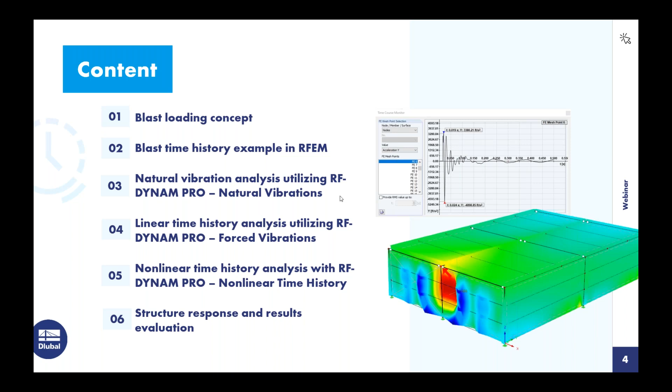We're also going to be utilizing a few different add-on modules within the program. The first is RF-DYNAM Pro Natural Vibrations, which will allow us to run a natural vibration analysis for our structure to determine the angular frequencies, the natural frequencies, and natural periods. Then we'll move on to a linear time history analysis utilizing RF-DYNAM Pro Forced Vibrations.

Finally, we'll take into account any material or geometric nonlinearities with the additional add-on module extension, RF-DYNAM Pro Nonlinear Time History. Through all of this, we'll definitely be looking at the structure response as well as the results evaluation for each one of these results.

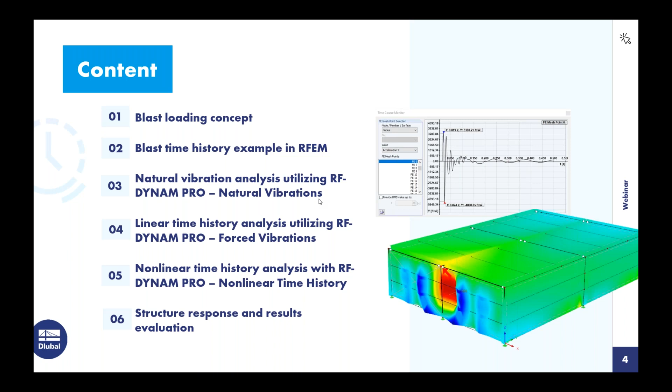Okay, so getting into the blast loading basics. As I mentioned, we're primarily going to be referring to the AISC Design Guide 26, Design of Blast Resistant Structures. We'll also be making some reference to the United Facilities Criteria 3-340-02, Structures to Resist the Effects of Accidental Explosions.

There are many more references out there for blast time history, but for today's example I wanted to specifically refer to Design Guide 26, because this simplifies the time history analysis quite a bit and was just the best guide for today's example within the program.

Now, what are the factors influencing structural damage when we talk about these types of explosions? Well, we know that the structure material is definitely going to play a role, as well as the overall mass and stiffness. What else is important to know is the explosion type, as well as the distance to the structure. Clearly, a larger explosion in closer proximity to our target structure is going to cause a lot more structural damage than what we'd see from a smaller explosion located further away.

And finally, the blast orientation to the structure. Is this located at ground level? Is it up in the air? What proximity to the structure? And of course, if we are located in an urban environment, do we have surrounding structures that we need to consider as well? Now, the ultimate goal here is not necessarily to avoid extensive structural damage.

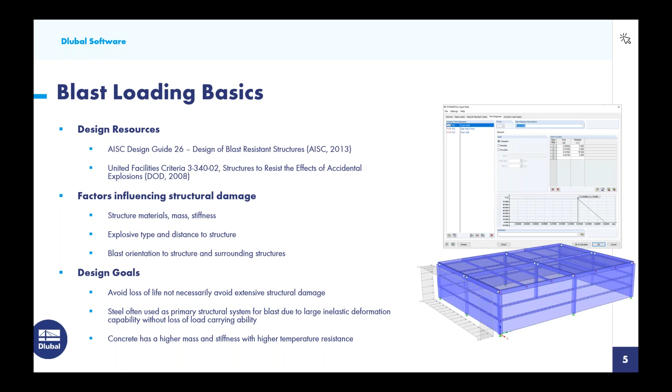The positive phase duration is the time period it takes for the pressure to return back to ambient, or back to zero, shown in the positive portion of the diagram. We also have what's called the positive impulse, which is the total pressure time energy applied during the positive duration—the area under the curve.

And finally, we have the negative phase duration. This includes the energy, again the impulse, which is the area underneath the curve that follows this positive phase, where the pressure falls below the atmospheric pressure.

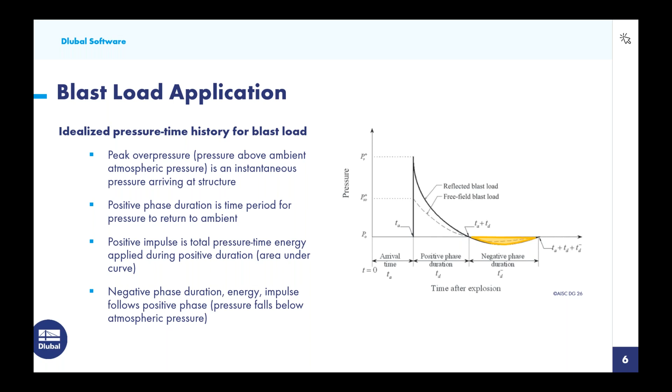Turning to the two different lines on this diagram, we have the reflected blast load shown in a solid line, and the free field blast load shown with a dotted line. So what exactly are the differences here?

We'll start with the free field blast load indicated by the dotted line. You notice the magnitude is much lower here. This is what we call the free field or side-on blast load, where the blast wave travels parallel to a surface, more or less sweeping over this surface with no impeding objects. We might see this with sidewalls, roof elements, or a rear wall, which is what we'll notice with today's example. Typically in most literature, we'll see the subscript SO used for side-on.

Now, we also have the reflected blast load, where the blast wave strikes a surface at an angle other than parallel. A perfect example would be any surface normal to the explosion, such as some type of front-facing facade. Obviously, we're going to have much higher pressures here than what we'd see with a wave sweeping over surfaces parallel to it.

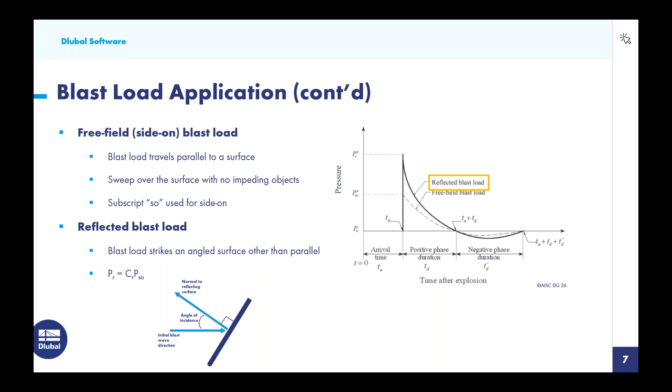So we calculate this reflected pressure with what's called the reflected pressure coefficient multiplied by the side-on pressure, given by this equation here. Referring now to the UFC document, there is a nice figure, 2-193, where you'll notice the angle of incidence is given on our x-axis.

Then we would locate our peak incident overpressure. We can follow this along to determine what our reflected pressure coefficient should be.

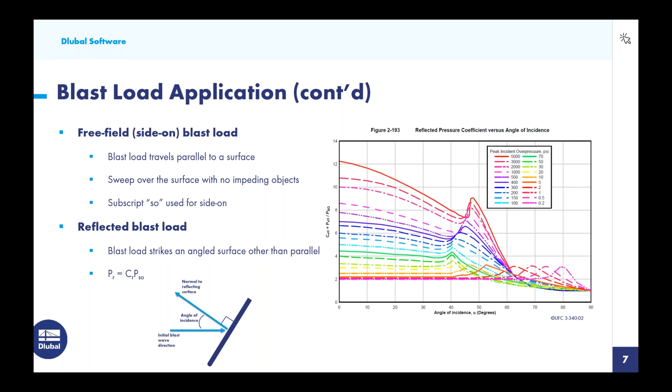So what exactly is the angle of incidence? If we look at this small diagram in the lower left, we have our initial blast wave direction. It reflects off of this surface normal, a 90-degree angle here, which will produce an angle of incidence. This is the value we want to locate within this figure to determine what that coefficient will be in order to increase those reflected pressure loads.

So moving on to the blast load simplification. Again, we're primarily referring here to AISC Design Guide 26. Let's first start off with the pressure time history positive phase.

What we're going to do here is simplify it to a triangular distribution, but still maintain that instantaneous rise as well as a linear decay. A quite simple application when we compare it to the more theoretical approach shown in the background here.

Now, it's important that the peak pressure as well as the impulse are preserved. Remember, the impulse is the area underneath the curve. So we have to come up with some other fictitious duration in order to maintain both P and I. This is estimated to be approximately 2 times I over P.

When we're talking about the negative phase, we're actually going to neglect this for the demonstration today, just for simplicity. Now, as engineers, we don't necessarily always want to neglect this. It could be important when we have elements on our structure that are weaker in the reverse loading direction, or we should also consider it for short natural periods compared to the load duration.

Some other considerations we will not be taking into account today include the drag forces due to wind or dynamic pressures—do we have a large wind load following along with this blast wave as well? Both Design Guide 26, the UFC document, and many others give consideration to these drag forces, and to whether we have large openings to account for interior loads due to leakage.

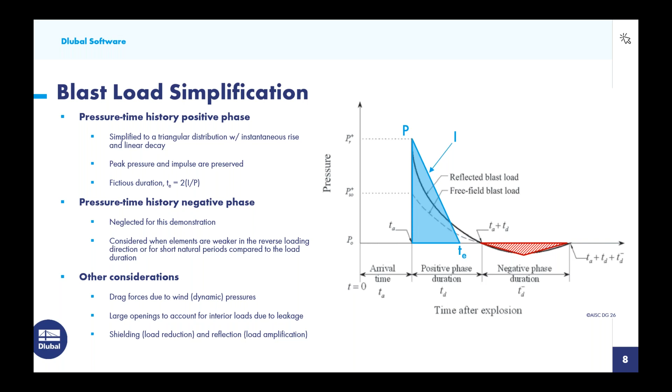On the positive side, we have what we can consider shielding, which is load reduction. When we have a blast wave and many other objects in front of our target structure, the load will be reduced. But on the downside, we have what's called reflection, where the load can actually be amplified because it's reflecting off of all these different objects directly onto our target structure.

So let's take a turn now from these basics and take a look at RFEM, which is our finite element analysis software. This is the main program where we'll fully model the structure. We can load it with general static loads and run a full analysis.

But when we're talking about dynamics or any type of time history, we need to utilize our dynamic add-on modules. We have a total of 4 of them. The first is RF-DYNAM Pro natural vibration.

This is a prerequisite. We have to go ahead and run the natural vibration analysis before we consider any of the rest of these dynamic analyses listed here. This is going to run the eigenvalue analysis, determine the mode shapes. We can take a look at angular frequencies, natural periods, and we'll definitely be doing that today.

The second add-on module, RF-DYNAM Pro equivalent loads. We actually will not be getting into this add-on module today. It is much more focused on seismic, and in particular a response spectrum analysis according to the ASCE 7, the NBC, and various international codes as well. I've done previous webinars on this topic, so refer to our website and YouTube channel if you want to learn more, but we won't be getting into that today again.

RF-DYNAM Pro Forced Vibrations does allow us to run a limited response spectra analysis. We can also take into consideration accelerograms, but what we'll be utilizing it for today is to run a linear time history analysis for these blast loads.

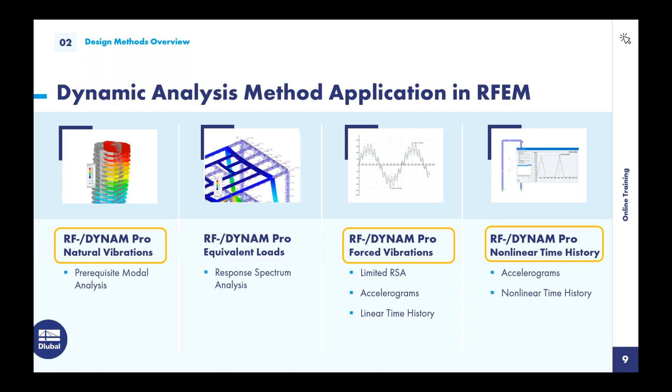In the short direction, we will have braced frames, and in the long direction, we have rigid frames. Everything will be composed of hot rolled steel sections, and then for my roof deck as well as my wall panels, we will be modeling ribbed metal surfaces here.

Now, the blast load will take place, and we can see that indicated over here on the left, with a charge weight of 500 pounds, and it is 50 feet away from the structure. So we can see it's normal to this front short face here.

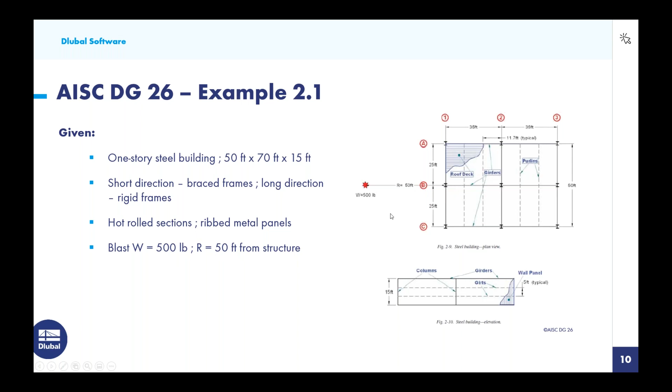So in order to consider the time diagrams for our time history analysis, we need to move through the solution to determine what all of these different variables are. We begin with the scale distance, indicated by the variable z. Z is given to us by r over the cubed root of w, which is simply 50 feet away from the structure with a charge weight of 500 pounds. Then we get 6.3.

On the right-hand side, you'll notice an additional figure taken from that UFC document, figure 2-15. This plot is showing the air blast parameters versus the scale distance. So we see the scale distance z that we just solved for on the bottom x-axis. Now there are some assumptions here with using this particular figure—you can see it's a positive phase shockwave parameters for a hemispherical explosion.

So not spherical, not located up in the air, but located at ground level and at sea level. If you have a target structure designed for a blast load somewhere other than sea level, there are scaling approaches you can take to scale this to meet those needs. It's also conservative here to assume a fully reflected surface, and that's what this plot is giving us.

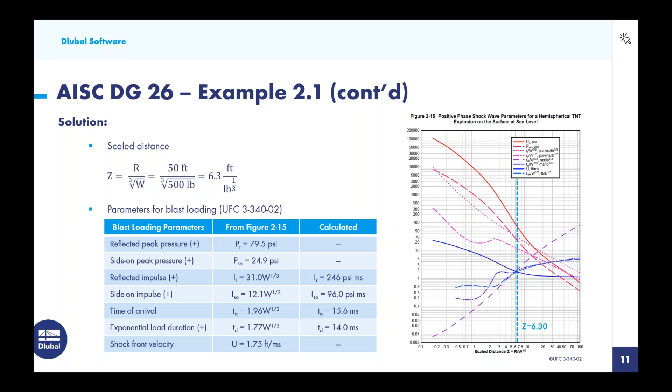All right, so let's talk about the reflected pressure. This would be applied to the front wall, and we are going to take the Design Guide 26 approach with the equivalent triangular shape. We want to utilize the peak pressure, P sub r, and the impulse, I sub r, and preserve these values. These are given on the right-hand side, but remember, from the previous slide we got this information, P sub r and I sub r, directly from this figure. So it's easy enough to come up with this equivalent duration for the positive phase blast load, with the estimated value of 2I over P equal to 6.19 milliseconds. This is all that is required for our reflected pressure for the front wall time diagram.

Moving on to the sidewalls and the roof, what we'll be applying here is the side-on pressure—remember, that smaller triangle within our idealized curve. For simplicity and the conservative approach, we're actually going to use the same scale distance Z that we used for the front wall centerline, also for the sidewalls and roof. Realistically, we could maybe calculate a larger Z to decrease our magnitudes, but again, for simplicity and the conservative approach, we'll just use those same values.

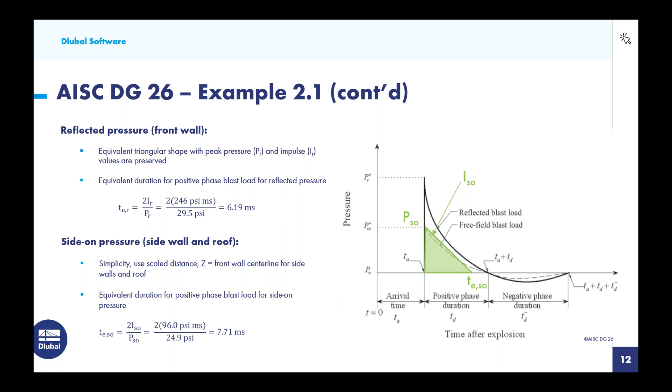Now, the final step here is the rear wall, which is a little different from what we just saw with the previous two structure portions. The advantage here is that our charge distance is going to be increased. We have our blast taking place about 50 feet away from the structure face. We can also consider the full length of the structure, 70 feet, so our new charge distance is now 120 feet.

So we calculate the scale distance with this new R value and we get 15.1. At the front of the structure, we have Z equal to 6.3; at the rear, Z equal to 15.1. Once again, we refer back to the UFC document to figure 2-15, and take a look at Z equal to 15.1—here is a summary of all our parameters.

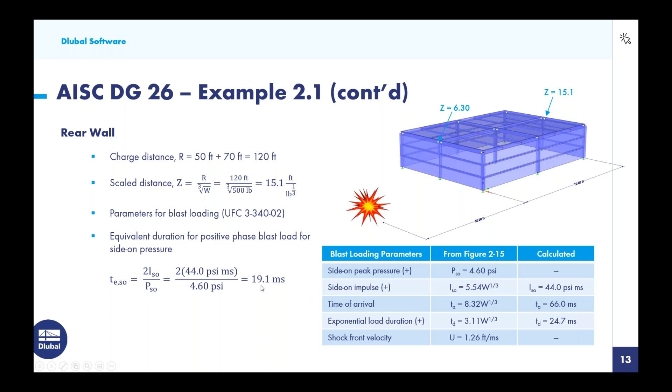Now, you'll notice I only listed the side-on peak pressure and the side-on impulse rather than reflected. This blast load is going to sweep over the rear wall—we don't have any type of reflected load occurring here, so that higher magnitude is not of interest to us. Now, we do need to calculate that equivalent duration for the positive phase blast load, and again we run this calculation with 2I over P using this data with our new Z value, and we get 19.1 milliseconds.

Now, it's also slightly different here in that for our rear wall, it's going to take the blast wave a little bit of time to ramp up to that full peak pressure. It's not instantaneous like what we're seeing with the front, side, and roof. So how do we calculate this? Well, we know the estimated time of arrival is 66 milliseconds.

We calculated that from figure 2-15. What we now need to calculate is this time to the peak pressure, T2.

That's easy to calculate. We take into consideration T sub A, the time of arrival, and add on L1 over U, where L1 is the span of the element parallel to the traveling wave. In our case, it's how long it takes for this charge to reach the top of the wall, which is 15 feet in height. U is the shock front velocity given to us from the UFC figure 2-15. So we have this length, divide it by velocity, get a time, and ultimately get 77.9 for T sub 2.

Now, the time to the end of the blast is just going to be T sub 2, and we add on that estimated time we calculated on the last slide of 19.1 milliseconds, giving us 97 milliseconds.

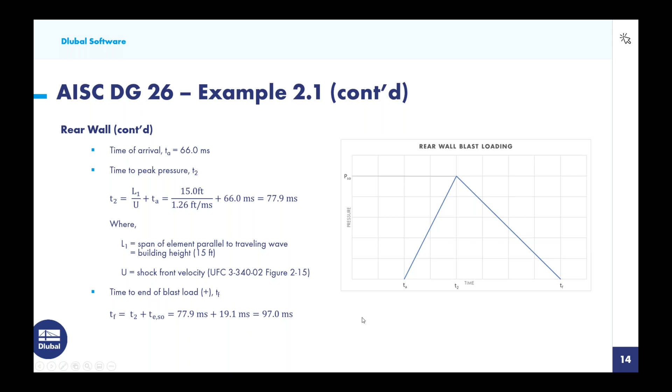Let's take a look at the summary for all three portions of our structure so we can see how this blast load is moving from the front of the structure to the rear. On the right-hand side, there's a plot showing pressure versus time of the blast wave. Green indicates the front wall, orange indicates both the side walls and the roof, and a bit later on, we have the charge reaching the rear wall.

On the y-axis is the pressure. We'd fully expect the highest pressure applied to the front wall, significantly less to the side walls and roof, because that blast load is just sweeping over those surfaces, and finally the rear wall will be relatively low as well.

A few assumptions I wanted to reiterate: we're using this equivalent triangular loading function over the more exact loading function. There are more theoretical equations, such as the Friedlander approach, if you wanted to calculate that curve exactly. We're going to neglect the negative phase of the shock, as well as other variables I mentioned, like dynamic pressure, openings, and so on.

Finally, for simplicity, the full side-on pressures are computed for the non-reflected surfaces—this includes the sidewalls, roof, and rear wall. This is the full value here. In the UFC document, there are load averaging techniques to decrease this magnitude. So a lot of the approaches we took today are the more simplistic, but also more conservative approach. The UFC has much more information for more detailed analysis.

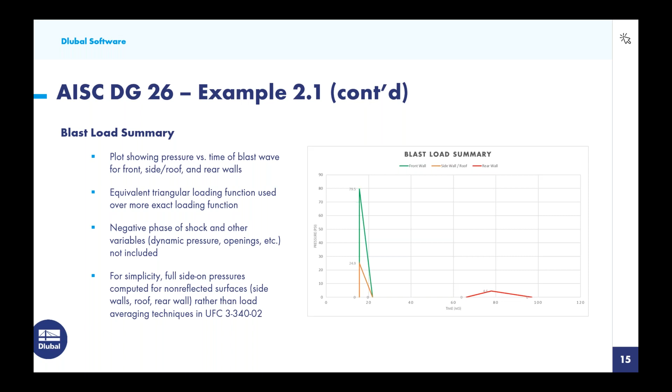All right, now we're ready to get into RFEM. You'll see the structure already modeled here—this is exactly from the PowerPoint as well as Design Guide 26 that I mentioned. It's a basic one-story steel structure, 50 feet in width, 70 feet in length, and 15 feet in height. We're going to assume the explosion happens on the left-hand side, normal to this front face. Let me quickly cover a few of the cross sections used in this example.

For my columns, I have W14 by 193. Looking at the roof, we have W18 by 130, used for the main beams and main girders. We also have our purlins, which are channel sections—channel 10 by 25. And our girts, which are again channels, C10 by 30 sections.

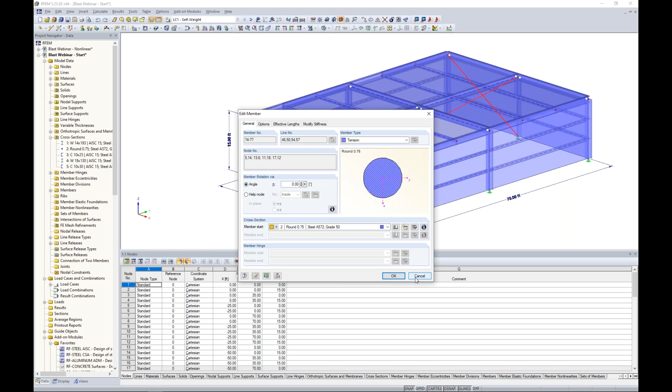It's also important to note, if I highlight these elements, we have a couple of X braces. Remember, in the problem statement we have brace frames in the short direction and moment frames in the long direction. I added this lateral bracing, and if I double click on it, you'll see these are tension-only members, so in the program they will take only tension forces—some type of cable element. When the program experiences compression in these elements, it completely removes them from the analysis, but since RFEM is a nonlinear analysis, it can reactivate them if we see tension again in a subsequent iteration. Let's keep that in mind for those X braces.

Now, looking at the surfaces, for both the roof and the walls, what I went ahead and modeled here are orthotropic stiffness surfaces.

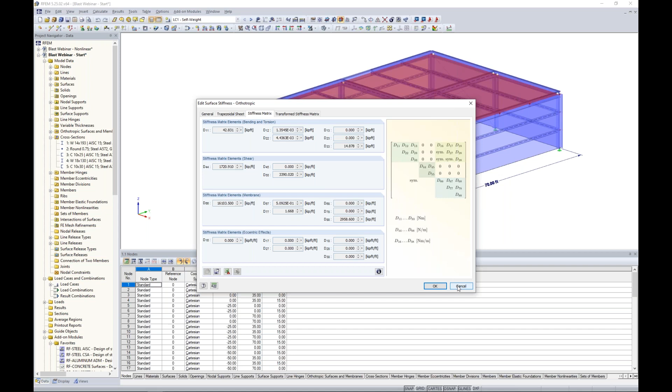When we go into the detail settings of this orthotropic stiffness, we'll see that I have set this to a trapezoidal sheet. What's convenient with this option is under the second tab, I can just put in the sheet thickness and some geometric variables for my ribs, including spacing. The program will automatically calculate my stiffness matrix for me. This is definitely going to add a lot of lateral stability to our structure at that roof level, and I went ahead and used it for the wall elements as well.

All right, so that is a basic overview of our surface elements as well as our members. Under my display, I'll go ahead and turn off my dimensions here. And let us discuss the loading.

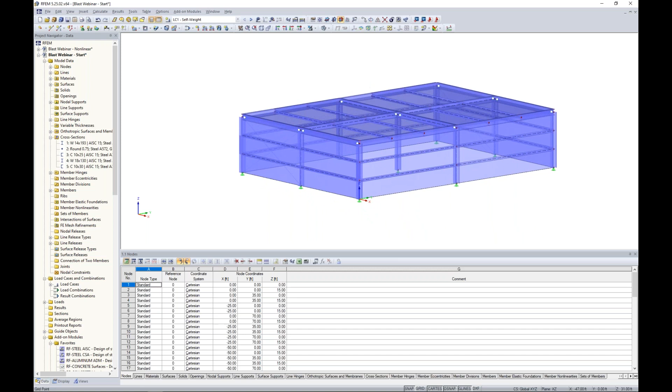I've created 4 separate load cases here. The first is self-weight, which will account for the self-weight internally of all of our members and surfaces automatically. But I've also added a general member load up at the roof level to those main beams and girders, 0.1 kips per foot, to account for any additional dead load that we may have up there.

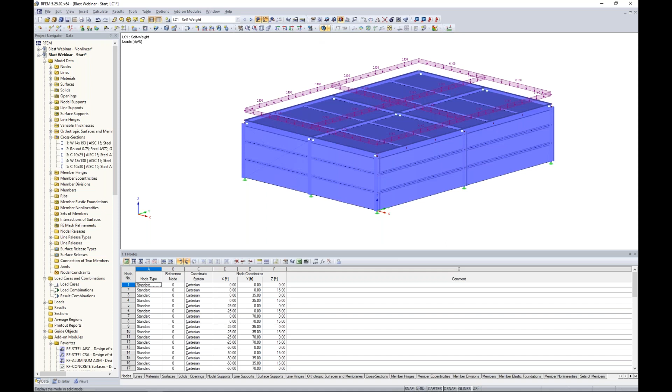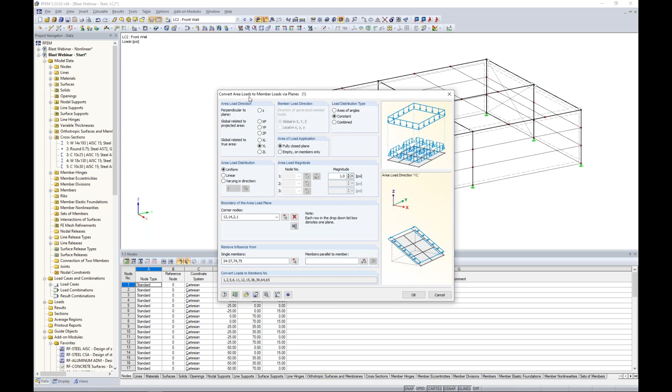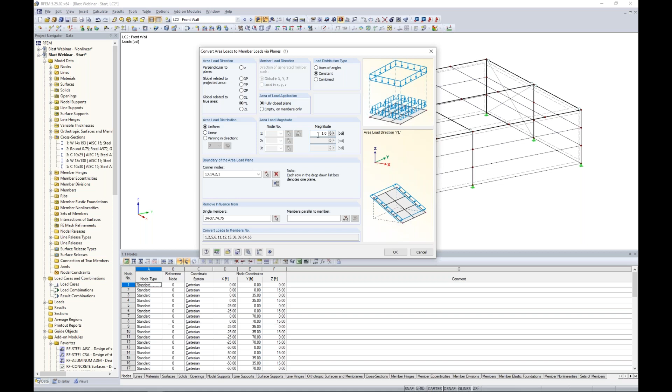Now, the next load is for my front wall, and we can see this load applied as an area load. This is to initially account for that blast load acting on this front surface. This area load is special because it converts the area load to a member load. I'm not applying it to the surface, but rather I want it applied directly to these main lateral resisting frames. The magnitude is set at 1 psi, an arbitrary value. Later, in the time diagram, I'm going to tell the program how this magnitude will increase or decrease and vary over time in the actual time history analysis, but for now we want to set this to 1.0.

So with this front area load, if I right click and display separately, we can see those as member loads based on their tributary width, applied directly to those frame elements.

In a similar fashion, load case 3 has area loads on the sidewalls as well as area loads on the roof, and again all the magnitudes are 1 psi. If I right click and display separately, you'll notice I applied them to those main frame elements. I did not apply them to any of the channel sections for the girts or purlins, and again I did not apply directly to the surface. I'm more interested in the structural response of these main elements included in our frames.

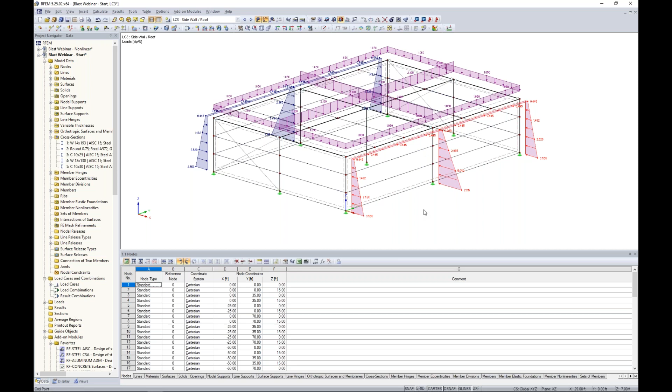Finally, our last load case has an area load applied to the rear of the structure, normal to that rear facing wall, 1 psi. I can right click to display separately, and we see those member area loads applied directly to those elements as well. So a very basic application here.

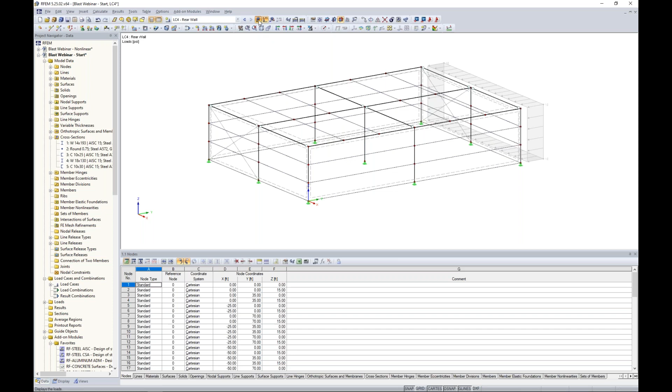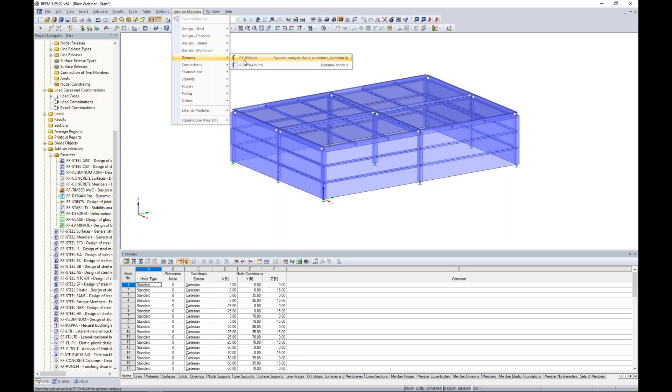Now we're not going to spend any more time within RFEM, but rather we want to move into the dynamic analysis. So I'm going to launch RF-DYNAM Pro, and we can see in our project navigator here is our long list of add-on modules. You can find RF-DYNAM Pro here, or go up to the add-on modules categorized under dynamic, and we launch RF-DYNAM Pro.

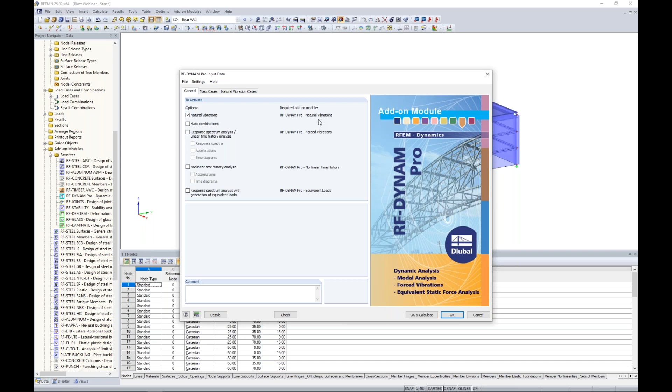This add-on module is nothing more than a simple dialog box that pops up, and here are those 4 different dynamic modules we discussed in the PowerPoint. You'll notice by default the first one activated is RF-DYNAM Pro natural vibration. This is a prerequisite; we have to run this natural vibration analysis before we move on to any of the additional add-on modules.

I also can activate my mass combinations tab, which gives an additional option if we wanted to combine multiple mass cases into a combination. I won't be doing that for today's example, but that is an option. So really, we just need to move from left to right here with our tabs. The first mass case, I'm actually going to import that first load case, which includes self-weight as well as that member load applied to the roof structure for those various elements.

Now I'm going to uncheck self-weight of structure. If I leave this checked, we're accounting for self-weight twice, which would be incorrect.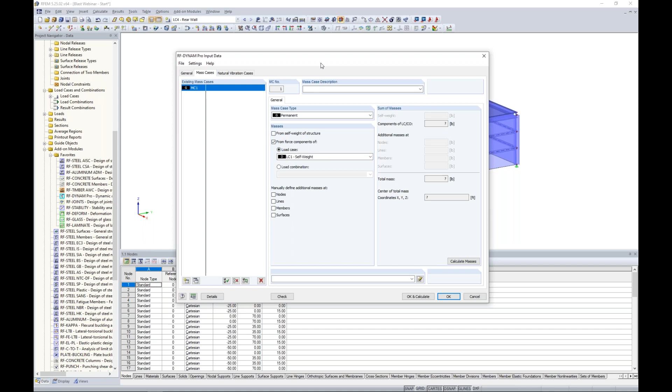We also have the ability to define additional masses at nodes, lines, members, and surfaces, and we can deactivate masses, so there are a lot of possibilities here. For now, we'll just stick with this single mass case and move on to our natural vibration cases.

We want to tell the program how many eigenvalues to calculate. For my structure today, I'll set this to 30. The scaling of the mode shapes we'll leave as the square root sum of the squares, and we can move on to the calculation parameters.

Under this dropdown, we want to select either our mass case or our mass combination of acting masses that we want to consider for the natural vibration analysis. In our case today, we only have one mass case, so that's what's available.

As far as the directions or axes about which this mass is acting, this is somewhat dependent on the type of mass matrix. With the diagonal matrix translational degrees of freedom, some options above are grayed out, but scrolling through translational and torsional, or rotational degrees of freedom, we have different options available. We'll move forward with the diagonal matrix translational degrees of freedom for today, as well as the general Lanczos solver.

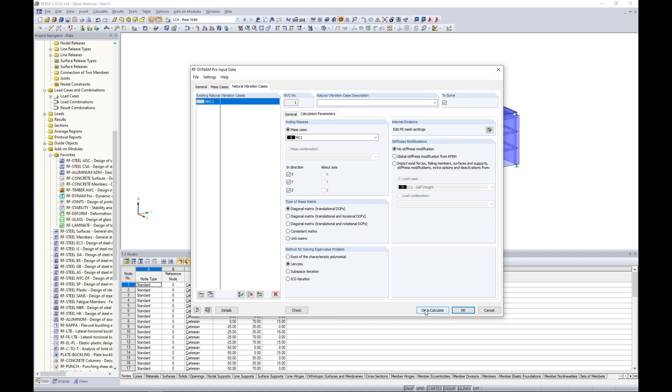Our help file, located at the lower left-hand corner, gives much more theoretical background on these different options and how they might improve the calculation for your particular structure. Once we're done setting all of our natural vibration case data, we can go ahead and run the calculation, and you'll see for today's example, this solves rather quickly.

So we are presented with our results of the dynamic analysis back in RFEM. We're technically still within this add-on module, which we can see from the dropdown box here. We also want to view this information in table 5 for dynamic analysis.

Let me go ahead and redock my tables here. What you'll notice within this table is the natural vibration case given to us within this dropdown, that's all we've solved for. But right next to it are all 30 mode shapes that we told the program to solve for.

We can scroll through these different mode shapes just to see how the structure is responding under the given frequencies. I always recommend immediately jumping to this effective modal mass factors tab. Scrolling all the way to the bottom shows the mass participation, shown at 95% in the X direction for a sum of all 30 eigenvalues, and 96% for a sum of all eigenvalues in the Y direction.

So this is great mass participation. We like to see something around 90% or more.

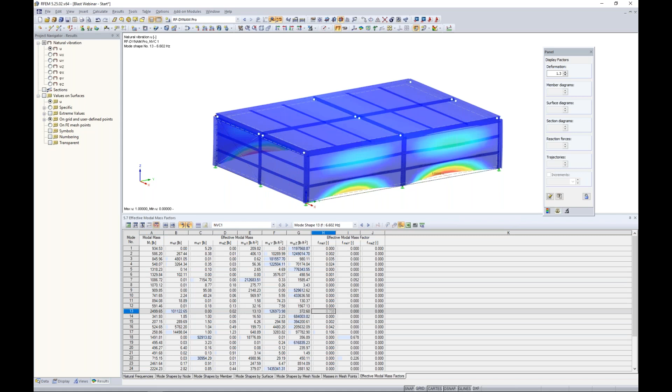What else I want to pay careful attention to is what we call the dominant modes. Looking at a lot of these early modes, they really don't have much mass participation going on until we get down to mode shape 13, where we have 74% participation in the X direction. Going a little further, I find my dominant mode in the Y direction, which is 68%.

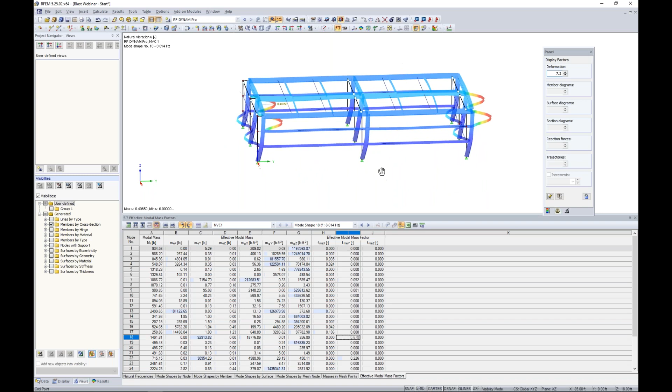Under our views tab, we can deactivate our surfaces and maybe increase our deformation, so we can see we're really getting a response of the structure as a whole. Of course, there are some more local modes with these girts, but overall this is certainly our dominant mode in the Y direction.

So keeping in mind mode shapes 13 and 18, we jump back to this first table, natural frequencies. Let's take a look at mode shape 13 as well as mode shape 18. For these two dominant modes, I can now determine my angular frequency, my natural frequency, and my natural period.

We might be thinking, well, what does this really matter for a time history analysis? But this actually does come into play a little bit later when we're talking about damping considerations, so we'll leave this highlighted in the background for now. It's great to understand which are our dominant modes for the structure in the natural vibration analysis. So let's go back into RF-DYNAM Pro then.

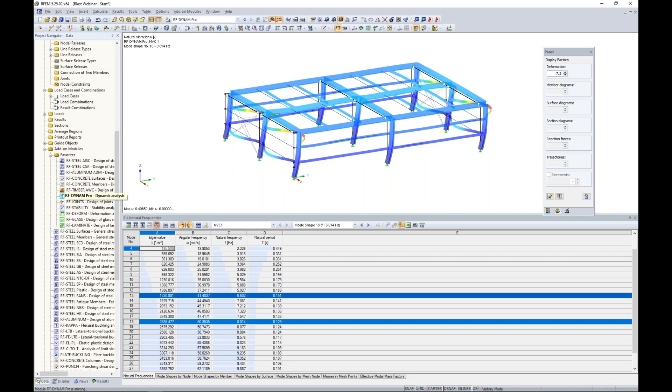What we can do now is activate RF-DYNAM Pro forced vibrations for time diagrams, and we get two additional tabs up at the top. Everything we've just input for the natural vibration case remains the same, so no changes to be made there.

Now we want to move on to our time diagrams tab. This is where we input the information we solved for within the PowerPoint, to tell the program how the loads applied back in RFEM as load cases will vary in magnitude and over time due to this blast load. The first time diagram we want to specify is for our front wall.

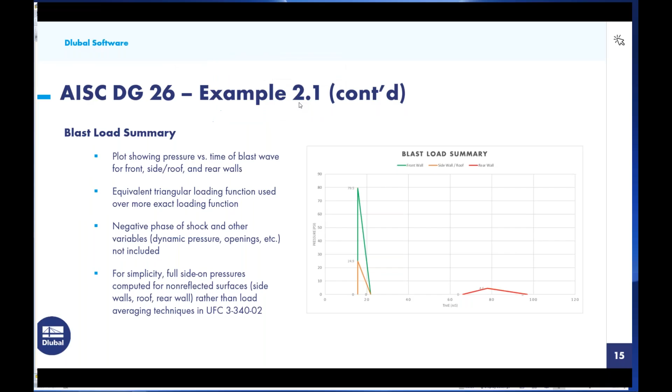I'll jump back to the PowerPoint for a quick refresher on what the time diagram should look like for the front wall. Using the simplified approach, we have a short time period until the time of arrival, then an instantaneous pressure rise up to 79.5 psi, and then a linear decay back to 0. All of our points are given here in terms of pressure and time, and this is the information we want to input into the program.

For the first time step we will specify a transient option. Transient means we can input each individual time step ourselves, which is what we'll be using today. We could also utilize a periodic option, which would be interesting for rotating machinery, for example, where we input an angular frequency as well as a phase shift.

Finally, there is the ability to input a function, where we can define variables and parameters. This would be extremely useful if we were taking the more theoretical approach for the idealized pressure-time history curve, such as the Friedlander equation. We have additional resources I can share if you're interested in that more theoretical approach using the function option—just reach out to us.

For today, taking the transient approach with the simplified application, we want to input these time steps. The first time step will be 0, 0. The second will be 0.0156 and 0. Then we have 0.01561 with a pressure of 79.5 psi, and then 0.02180 and 0. This looks identical to what we just saw in the PowerPoint.

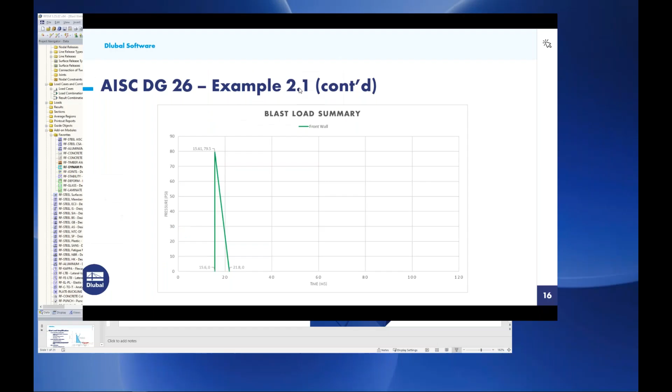For the next time diagram, we'll simply take a copy of the front wall and rename it to side wall and roof. Going back to the PowerPoint for a quick refresher, the time diagram looks identical to what we saw for the front wall, with the difference that the pressure is much less here—only 24.9 compared to 79.5 for the front wall—because this blast wave is just sweeping over these surfaces rather than reflecting.

Once we have these input points, we go back to RFEM. The time stays the same in this first column—all we need to do is change the magnitude, or multiplier, to 24.9. And here is our second time diagram.

Now the third time diagram will be for our rear wall. Let's refer back to a nice summary: we don't have that instantaneous rise in pressure here, but rather a linear rise in pressure over a certain time period, and then a linear decay back to zero. This also occurs quite a bit later in time compared to the front wall and the side walls and roof.

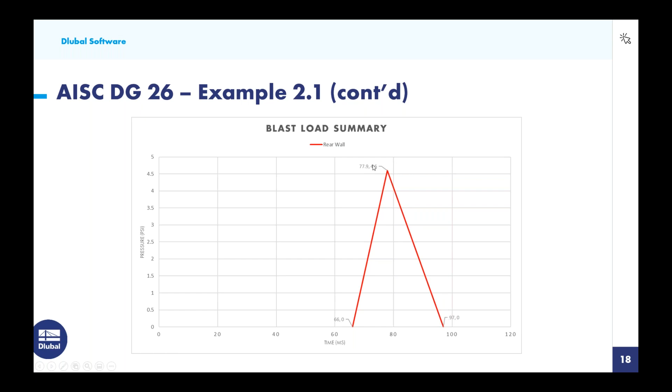We want to take note of all these various points—our max pressure here is only 4.6 psi, much, much lower. Going into this last time diagram, we input our points: 0, 0; then 0.0660; then 0.0779 with 4.6 psi; and then 0.097 and 0.

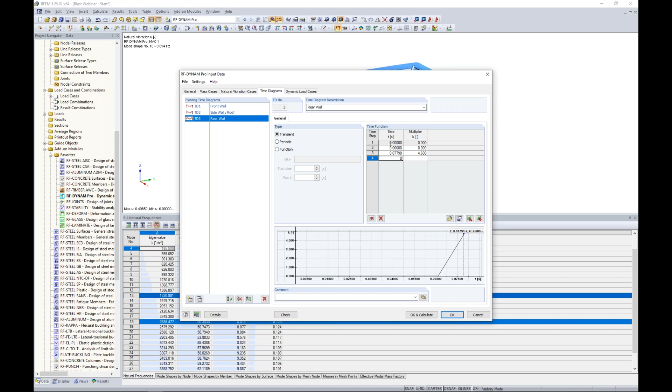And it looks like we lost that one, 0.097 and 0. Okay, so here is our time diagram for our rear wall.

Notice that these are just multipliers. So when I say 4.6 psi, all we're going to end up doing is relating it back to those load cases that we set in RFEM with 1 psi. It was important to use 1 psi because we'll use this multiplier to affect the magnitude over the time duration.

All right, so once we have input all three of these time diagrams, we can finally move on to the dynamic load case tab. This first dynamic load case I will title linear, and notice only our linear solvers are available to us.

The rest of these that are grayed out are all related to the other dynamic add-on modules that we do not have activated. We will be utilizing a linear implicit Newmark analysis solver, and notice that the natural vibration case is completely grayed out here. That's because we do not use this information for this particular solver. This is in comparison to the linear modal analysis, which heavily depends on that natural vibration case.

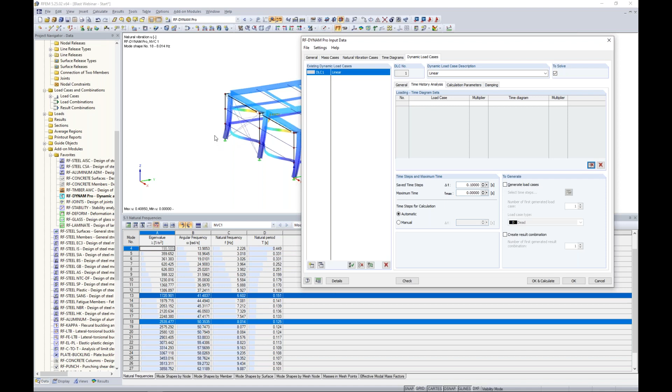So with the Newmark analysis, we can move on to the time history analysis. This is where we are going to relate those load cases back in RFEM. Remember the front wall area loads, then the side and roof area loads, and finally the rear area load. We relate this to the relevant time diagram.

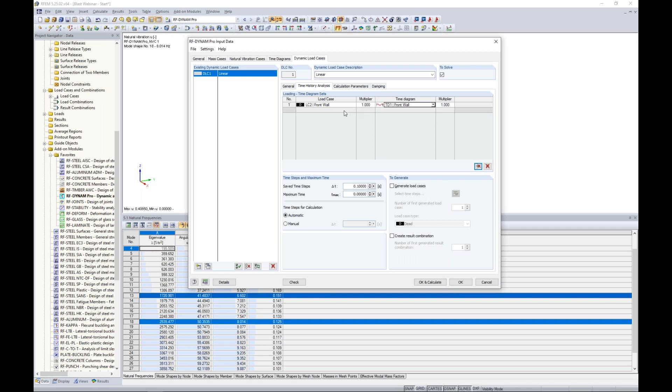So the load case here, front wall, is going to be related to my time diagram front wall. This is telling the program how to adjust the magnitude over the full duration of this blast analysis. The second set will be our sidewall roof related to our sidewall roof, and finally we have our rear wall, which will be related to our rear wall.

Now, as far as the saved time steps, when we set this to a higher value, it really has nothing to do with the analysis. It's just what is going to be shown to us back in RFEM when we review the results. By setting this to a larger number, we're definitely going to reduce the file size and shorten the calculation. But if we do not have enough time steps, then we're not going to accurately capture the results.

So some of those max and mins, we want to have nice smooth curves for something like our time course monitor. So for example, today we'll set this at 0.001. Now, the maximum time will only be 0.5 seconds. This is a very short duration, and we don't need to set this to something like 10 or 20 seconds, because everything is happening so quickly in milliseconds that 0.5 seconds will accurately capture what's going on with the structure response. Now, the time steps for calculation, this is important for the analysis internally.

It's really a compromise between calculation time and accuracy. So there is the automatic option. You can refer to our help file if you're interested in determining how the program will set this automatic time step, but I think for something like a blast analysis that's such a short duration, it's a little bit better to have full control over what time step you're using.

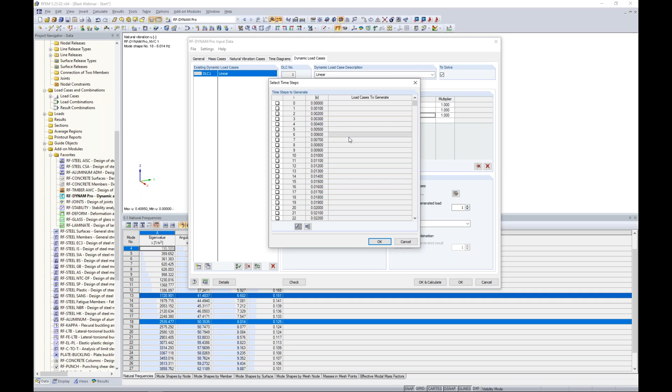We do have the ability to export out load cases here for each one of these time steps. You can see that when I go into the details, I can turn on and off the various time steps that I'd like to export out as load cases. But keep in mind, it's a little deceiving because we're not exporting out the loads. We are exporting out the results for the selected time steps.

So we won't be doing that today, but the other option is to export out a result combination. This is going to be an envelope solution for all the time steps that we've considered here.

We can combine those result combinations with additional static loads if we'd like. For the calculation parameters, remember the program knows nothing about the natural vibration case based on the Newmark implicit solver.

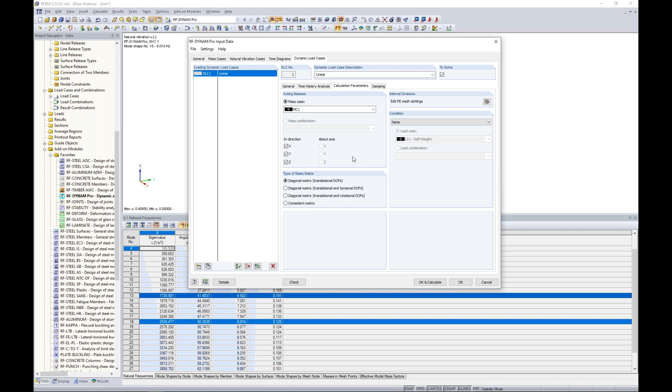So we need to redefine the acting masses here. We leave this as we've already set before, mass case 1, diagonal matrix for translational degrees of freedom. And finally, we have our damping consideration.

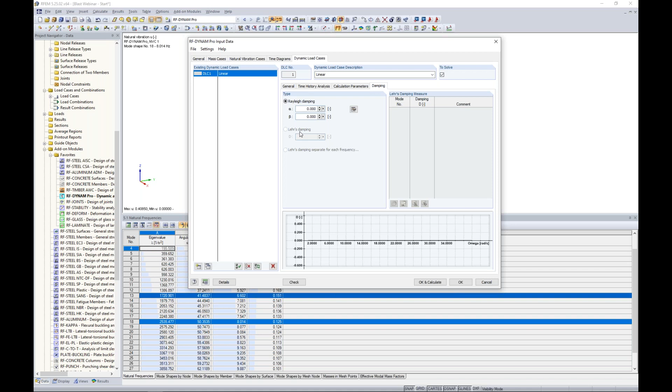When we're talking about the Newmark solver, we have to think about damping in terms of Rayleigh, and most of us are likely more familiar with Lehr's damping. For a steel structure, Lehr's damping might be around 2%. We just need to do a simple conversion here, and it's actually an equation with two equations, two unknowns. We can easily calculate both alpha and beta based on the Lehr's damping that we want. Alpha relates to the mass portion of the damping matrix, while beta relates to the stiffness portion of the damping matrix.

So we can either do that manual calculation ourselves, or we have a nice tool in here. This tool allows me to input a couple different mode shapes for the angular frequency, as well as my desired Lehr's damping. This is why I have saved in the background mode shape 13 and mode shape 18 - remember, those were my dominant modes for that natural vibration case.

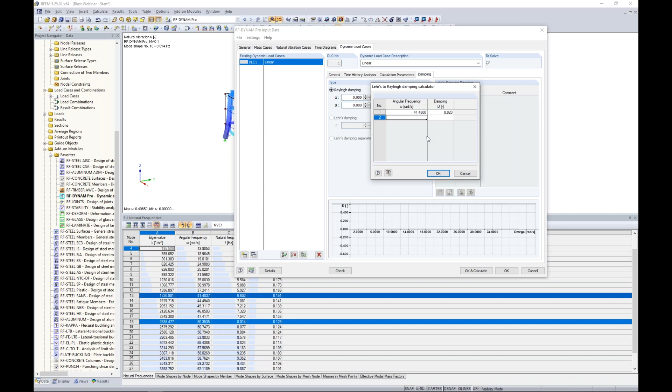So I can input my angular frequency for mode shape 13, which will be 41.48, and the damping consideration will be 0.02 for Lehr's, so 2%. Same process for mode shape 18 - this time our angular frequency was calculated at 50.35, just given to us here in the background. I want Lehr's damping to be 2%. I click OK, and the program automatically calculates alpha and beta for me.

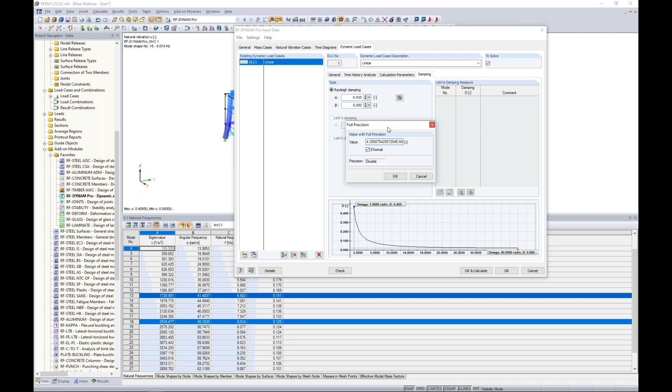Beta may look like its value is 0 here, but we can go into the full precision and see that it's just a very small number, 4.36 times 10 to the negative 4.

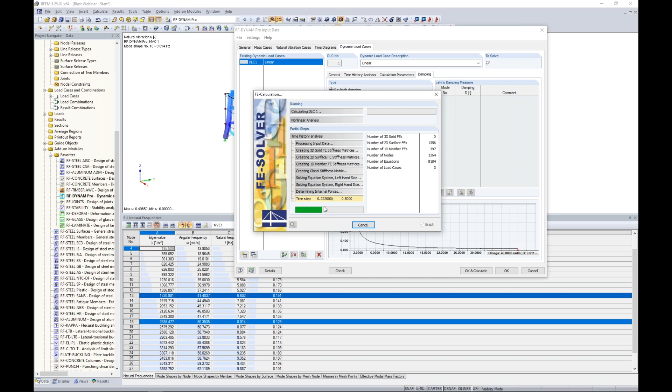So once we have input all of our information for this initial linear time history analysis, we can run our calculation. And for a linear calculation, you can see it actually solves pretty quick. We have our progress bar shown here at the bottom, and we set our time step at every 0.001 seconds, with a total duration of only 0.5 seconds.

Once this is done solving, you'll notice that we'll be given back into RFEM here, and I'll go ahead and cancel out this visibility. We're technically still within this add-on module, RF-DYNAM Pro. We go to table 5 here.

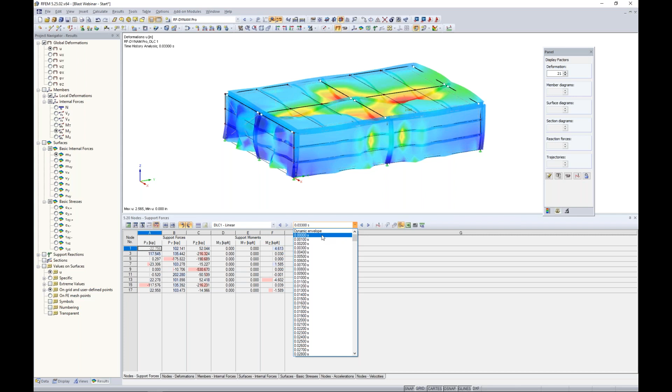Under my dropdown, I have my natural vibration case, but now we have our dynamic load case as well. Right next to that is going to be all of our saved time steps. So if we're looking currently at the global deformation here, we have time step 0. We can actually scroll through these, and remember, nothing's happening on our structure here until we have that estimated time of arrival at about 0.016 seconds.

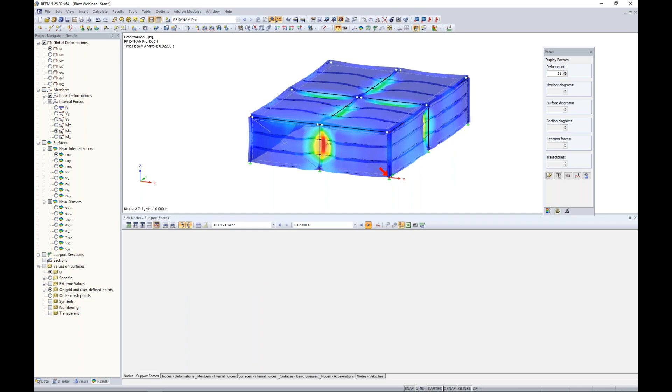And that's where we start to see this blast load impact our structure. We continue scrolling through these different time steps to slowly see that wave load travel from the front of the structure to the center and the roof, and clear back to the rear of the structure.

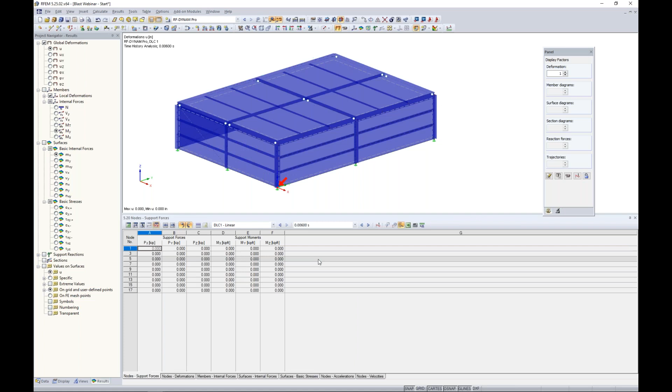Now, for any one of these time steps, or you'll also notice that we have a dynamic envelope up here at the top, all of our results are going to be given to us in table format. So we'll see member internal forces, we can view node deformations, stresses on our surfaces. We can export all of this information to Microsoft Excel at the click of a button if we wanted to do some further sorting. We can view all of this information graphically here as well with our project navigator.

What I think is most of interest is a time course monitor, though, when we're talking about a time history analysis. So with a time course monitor, we can go ahead and launch that directly from our table tools here, and I can graphically select a single node, for example. With this node, you'll notice the program automatically updates my time course monitor.

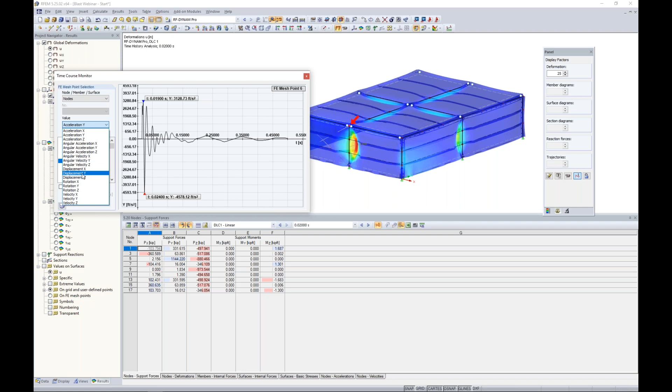Let us take a look at the acceleration in the Y direction. So we can see here the acceleration at this particular node shown over the full duration of the 0.5 seconds for our time history analysis. And if we want, we can turn this to, let's say, displacements in the Y direction. So we're seeing these large displacements and they're slowly dissipating over time.

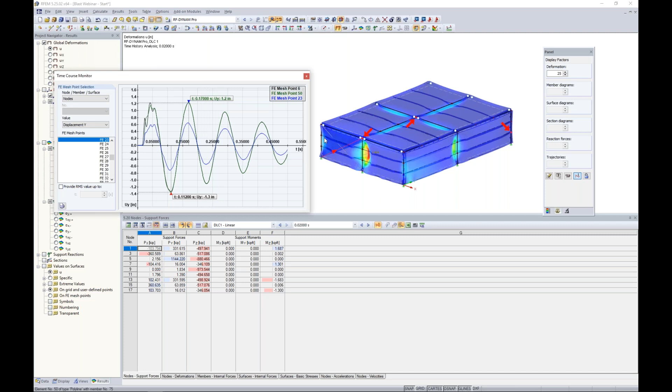We also have the ability to hold down our control key and select multiple nodes if we'd like, to generate them on this same time diagram. You'll notice those will just be overlaid here. We can right click, view these as numeric values, and export this information to Microsoft Excel as well.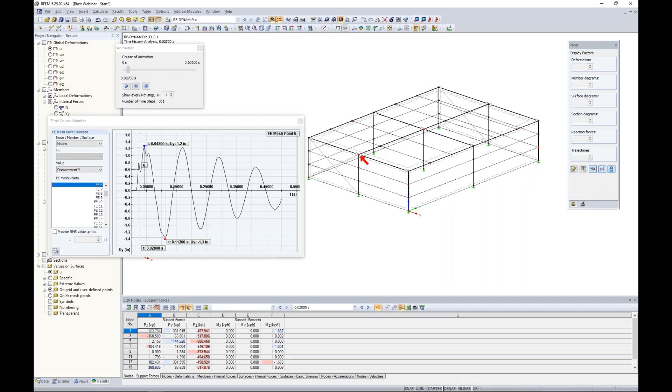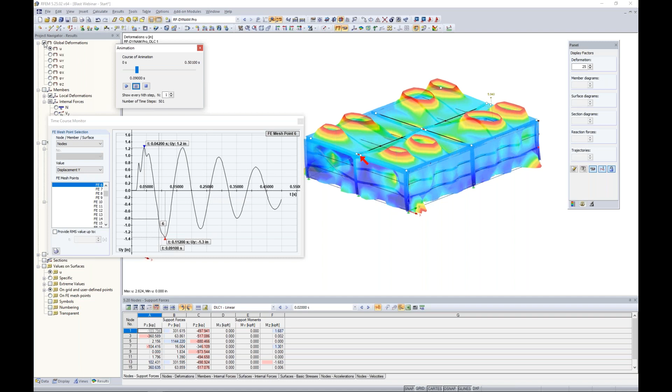Now also within this option is the ability to view animations. If we take a look at our structure and turn on our animation mode, when we play this and turn on our global deformations, we're going to see the structure's response to these deformations over time, so we'll be able to see how these surfaces and members are moving. You can see that the time course monitor is slowly moving from time step to time step. This information that is plotted here is important for those saved time steps, to make sure we get nice smooth curves for our particular analysis.

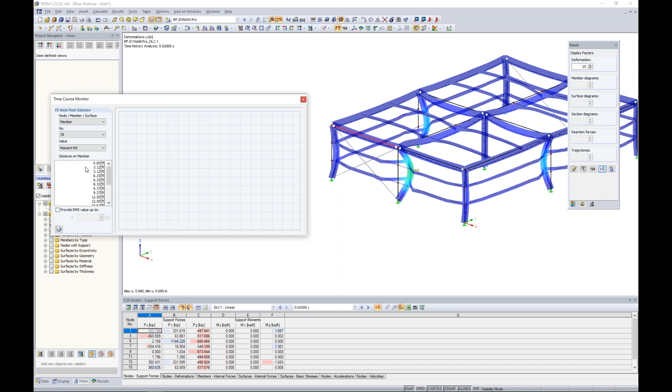The other thing of interest to us is some of the internal forces for our members. Let me turn off the display of our surfaces so we can get a clear view of our member elements. We'll select this member, one of our front beams, and take a look at our moment about the global x-axis. We can see we're definitely seeing higher moments early on with this blast impact analysis, and then it will slowly dissipate over time as well.

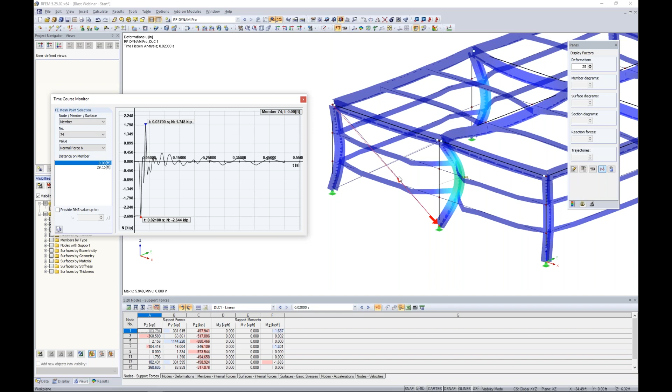If you remember, what else is of interest to us is this tension-only member. With the tension-only member, we technically should see only tension forces. So I'm taking a look at this within the time course monitor for my normal forces for member number 74, and we can see it highlighted here. But here's the problem: we're seeing compression forces of negative 2.64 kips, telling me that this cable element is taking on a compression load of 2,600 pounds. We certainly know that cannot be the case.

So why is this? Well, this is simply a limitation of the linear solvers. Any nonlinear element, so when we're talking tension-only members, they are automatically converted into truss elements for the linear analysis. The program only knows what it knows, and if it sees a truss element internally, it's going to think it can take on these high compression loads as well—there's nothing stopping it. Same thing with nonlinear supports: if we have supports that fail in uplift, sure, that's easy enough to define in RFEM for the static analysis, but this linear solver will convert it to a linear support when it runs the dynamic analysis. And finally, something like nonlinear materials—plastic materials for steel design—will be converted back to linear elastic materials.

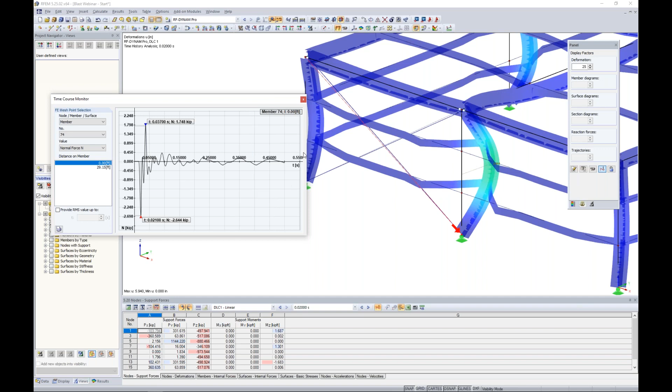So how can we overcome this, knowing these nonlinearities are extremely important for our blast design? This is where we go back into the add-on module. We go up here to the current module, RF-DYNAM Pro, and activate nonlinear time history for time diagrams. You'll notice none of my tabs changed here—in fact, my time diagrams that I previously defined, we're going to use those again. Under the dynamic load cases, I'm only going to make a copy of my linear load case, and we'll call this one nonlinear.

What the nonlinear time history add-on module extension does is release these two nonlinear solvers. So now we have the nonlinear implicit Newmark analysis as well as the explicit analysis solver. For something like a blast load, an impulse load, it is suggested to use this explicit analysis, and that's what we'll be using today.

Under the time history analysis, again because we made a copy, nothing changes here. The only modification we want to make is the time steps for calculation. Remember, a nonlinear analysis requires a much, much smaller time step, just because we have these extremely rapid changes under such short durations that you have to have a very small time step to accurately account for this. So under the full precision here, we make this so small that it will be 1 times 10 to the minus 6 power—very, very small.

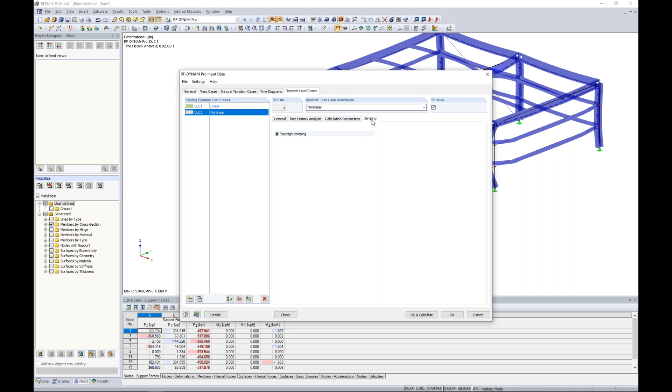Realistically, under calculation parameters, notice only the diagonal matrix is available for this particular explicit solver. For damping considerations, we can leave this the same, but the program will only use the alpha coefficient for this particular solver. So as you can imagine, this is going to take a little bit longer to solve than what we saw with our linear analysis.

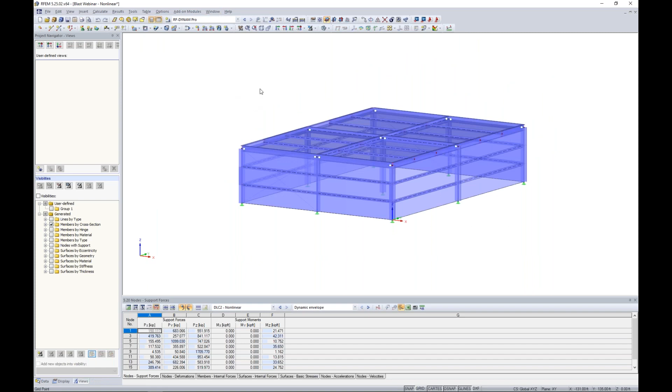So what I went ahead and did is run the results for us and open up a saved model. Once those results are done running, we'll be given back into RFEM. In my table 5, I now have my natural vibration case, my linear dynamic load case, and now I have my nonlinear dynamic load case available to me as well.

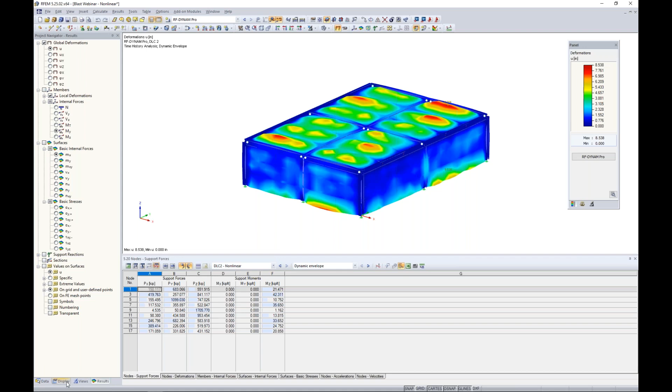Now, we don't need to cover all the various ways to view the results, since it's identical to what we just saw with our linear analysis. But what might be interesting is if we go under the Views tab and turn off our surfaces here, and let's focus in on that tension-only member.

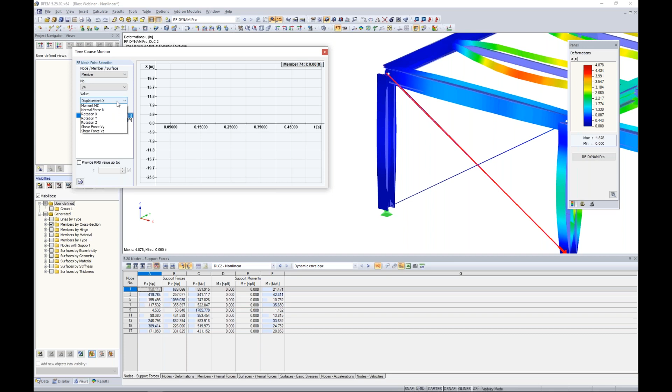So I'm going to launch my time course monitor. I'm going to select that particular member that we saw before. It doesn't matter whether we choose 0 or 29.15, the start or end of the member, but I do want to view the normal forces.

And now you can see how drastically different this looks. This member is only taking on tension forces. The minute it sees any type of compression, it's taken out of the analysis, but when tension is reintroduced into the member, it is activated again. So we're only seeing those positive forces here.

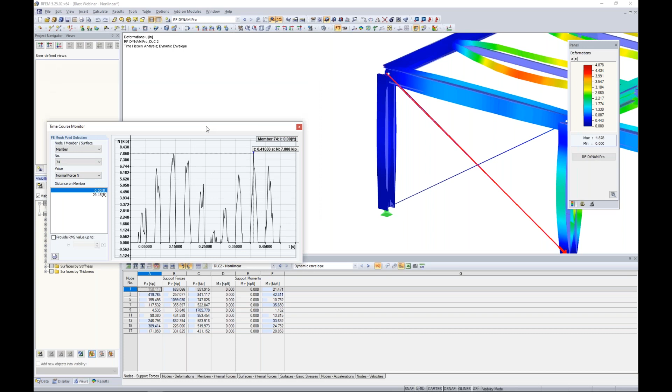We also have the ability, if we take a look at our results tab here, to activate the animation. I thought this might be interesting for you guys to see, that when I go ahead and run the global deformations here for the structure, you can actually see the element. Let me also turn this into wireframe view.

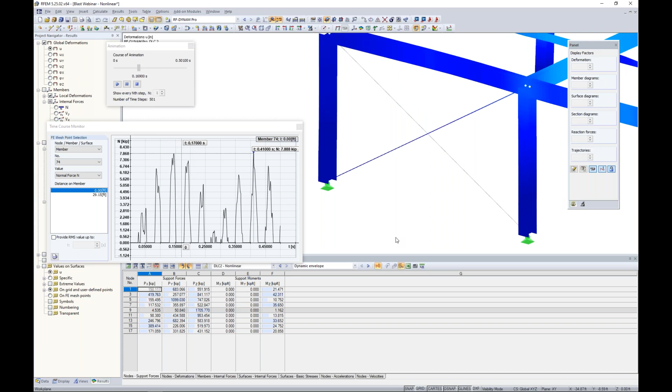These two elements are deactivated and activated, so you can see them graphically turn on and off as we move through the total duration of this time history analysis. So certainly a big advantage here if we have those nonlinearities that we want to account for with this blast analysis or any type of nonlinear time history, we would want to utilize these nonlinear solvers.